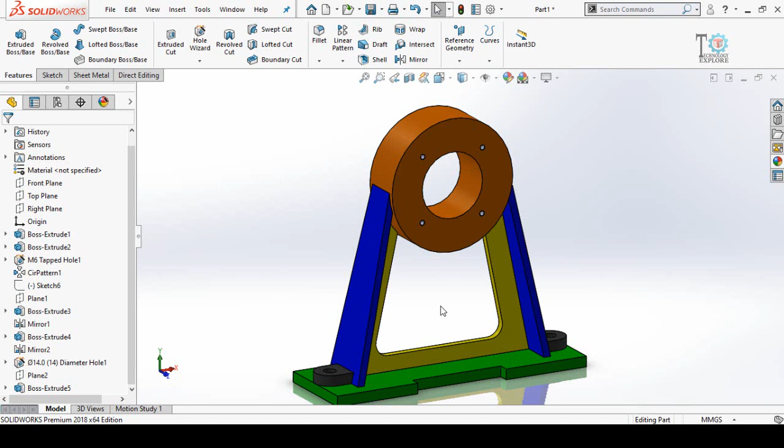My name is Usman Chaudhary and in this video I'm going to make this part by using this drawing. The most complicated portion of this drawing is making this part of the project.

Okay, let's start. First of all, make a print of this drawing and start from the top plane. I will start making a sketch of this part. As you can see, this seems to be a rectangle, so draw a rectangle like this.

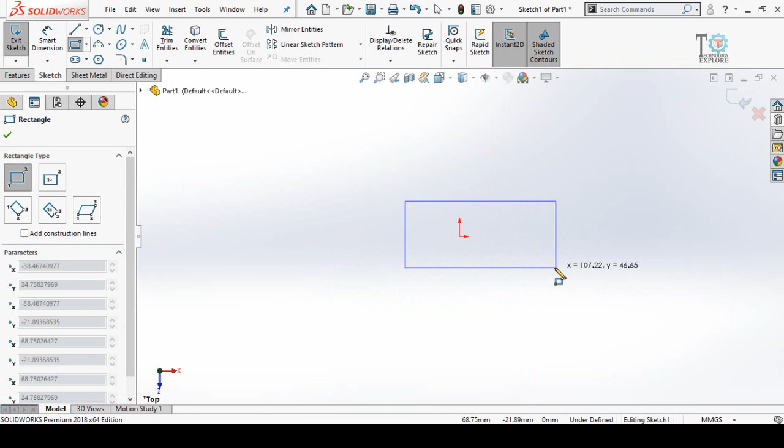Press escape key and then press and hold control key, select the origin and this point, make their relation horizontal. Similarly, make the horizontal and vertical relation for these 2 points. Now define by using smart dimensions.

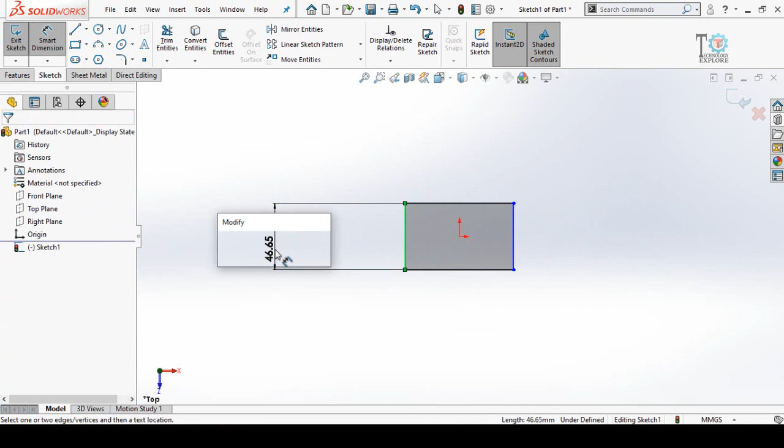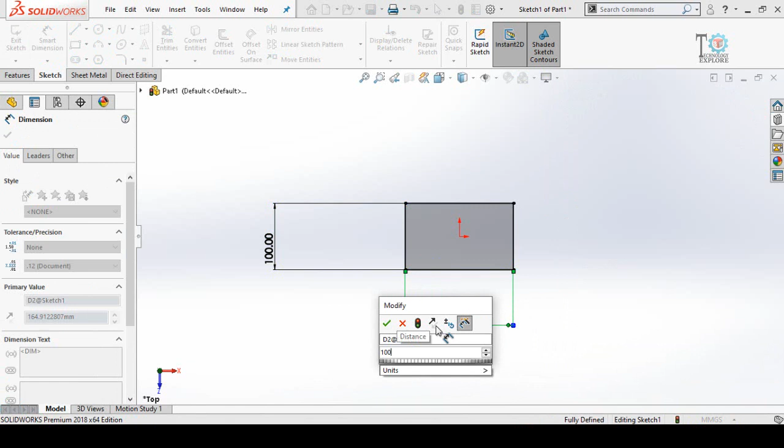This distance is 100 millimeter, and this distance, as you can see, we do not have the complete distance, so we have to sum all these distances. So make the sum: 100 plus 110 plus 100. Draw a line like this.

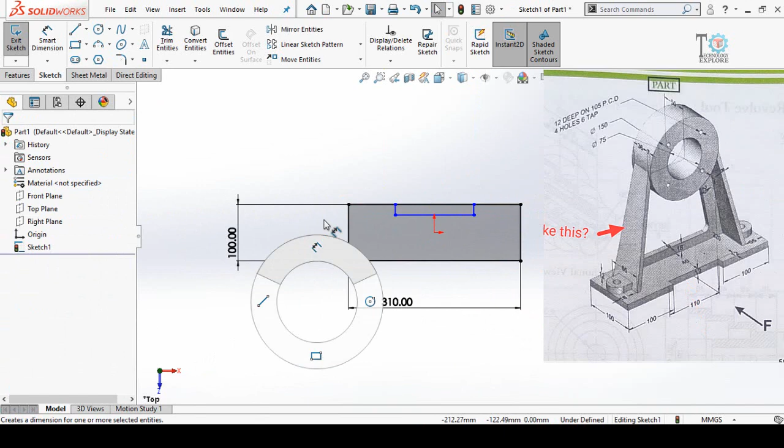Now I'm going to make this cut. Press and hold control key and select origin and this point, make their relation vertical. Define the distance, this distance 12 millimeter, this distance is 110 millimeter. Now press escape key.

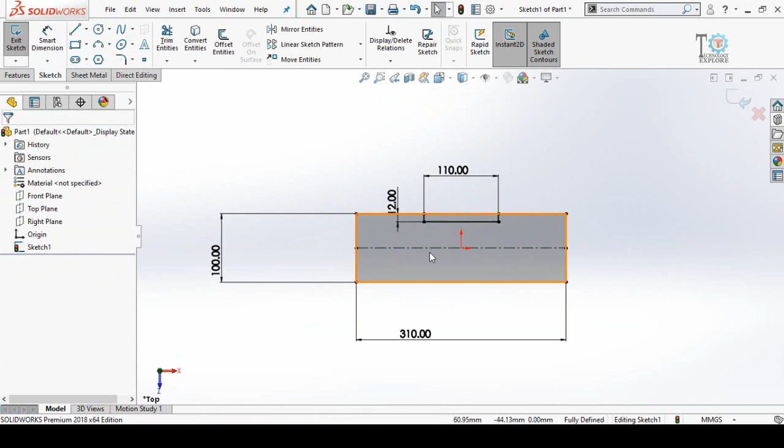Draw a center line like this. Press escape key and use mirror entities to mirror. Click on this box and select this and this. Mirror about, select this box and select this center line, and press OK button.

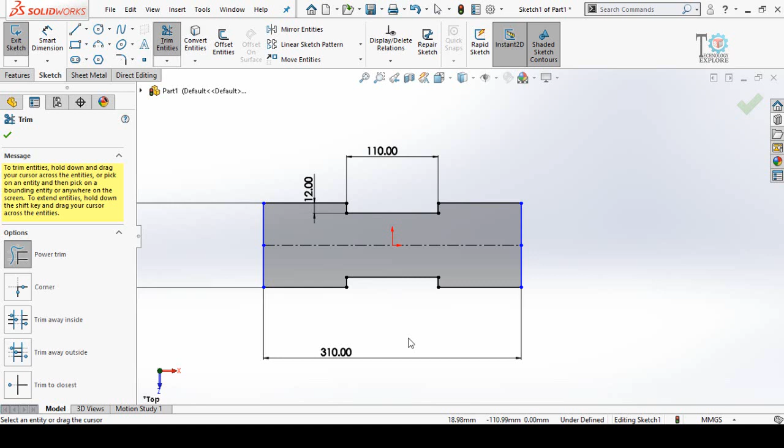Now select trim entities and trim this side, also this side. Press escape key and again define the distance, this distance 100 millimeter. So our sketch is now, you can see, fully defined.

Now we have to extrude this sketch. This is also 12 millimeter.

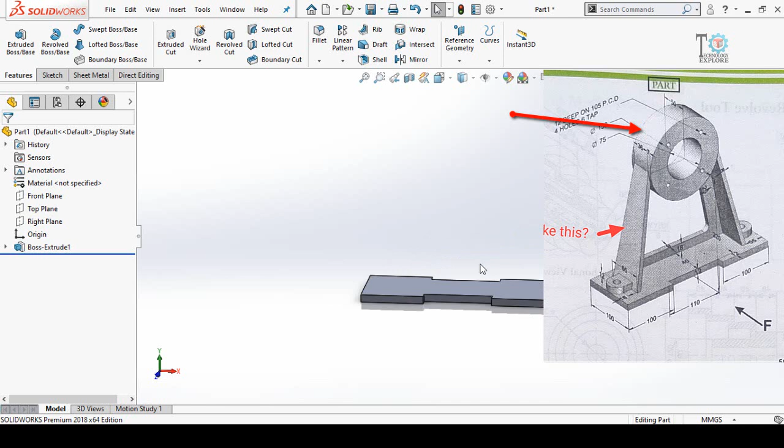Now I'm going to make this ring. We have to click on front plane, so sketch on it, make normal to by pressing Ctrl plus 8 from your keyboard, and draw 2 circles, one circle and another circle.

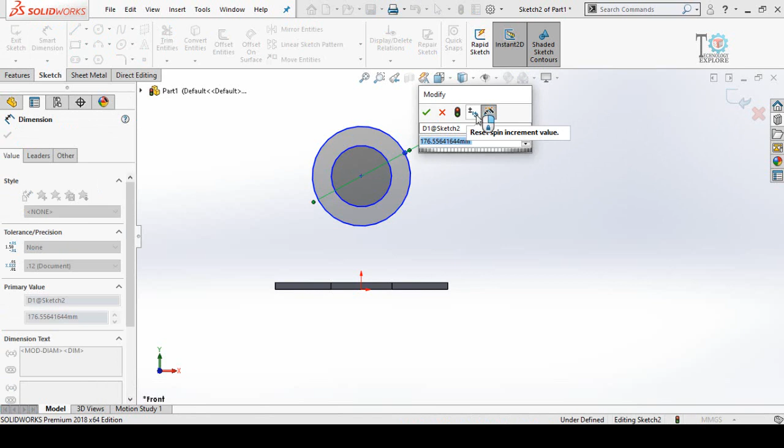Now define the diameter of the outer circle, 150 millimeter, and the diameter of the inner circle, 75 millimeter.

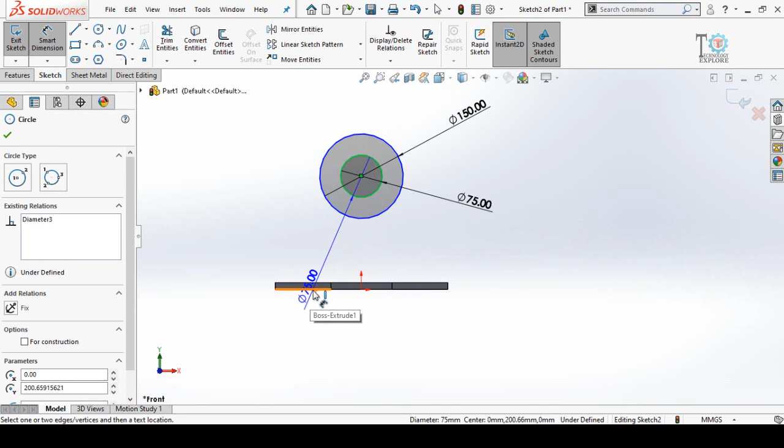Press escape key and select origin and this center point, make their relation vertical. Again define the distance from the center of the circle up to the bottom of this part: it is 220 millimeter. As you can see, our sketch is once again fully defined.

Now we have to extrude it. Go to features and select extruded boss base command, make sure that from here drop down this option and select mid plane. Now define the width of this ring, 50 millimeter.

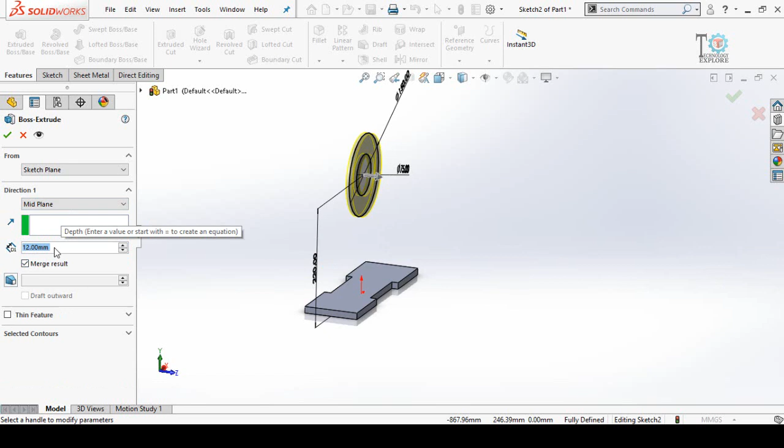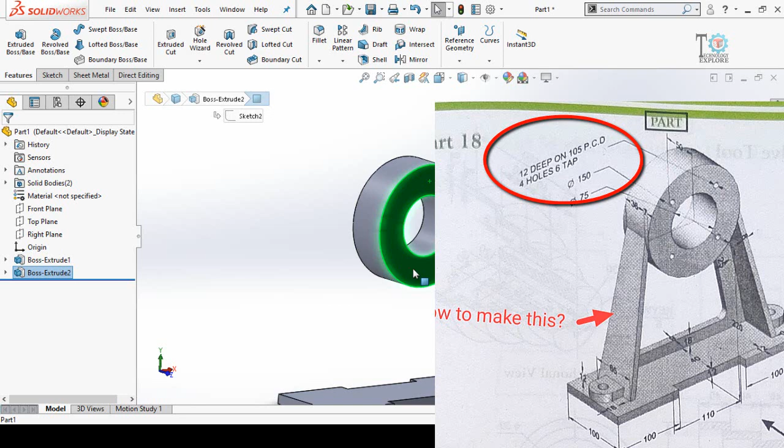Now we have to make 4 holes on this ring. First read the drawing carefully. It's written 12 deep, meaning 12 mm in depth, on 105 PCD, meaning the circular diameter of the holes is 105 millimeter. 4 holes, definitely the number of holes is 4, and 6 tap, meaning M6 threads.

So what I'm going to do is use this hole wizard command. Scroll down and from here select this straight tap option, then again scroll down. From the size option, drop down and select M6. Here is the depth, type here 12 as they were 12 deep.

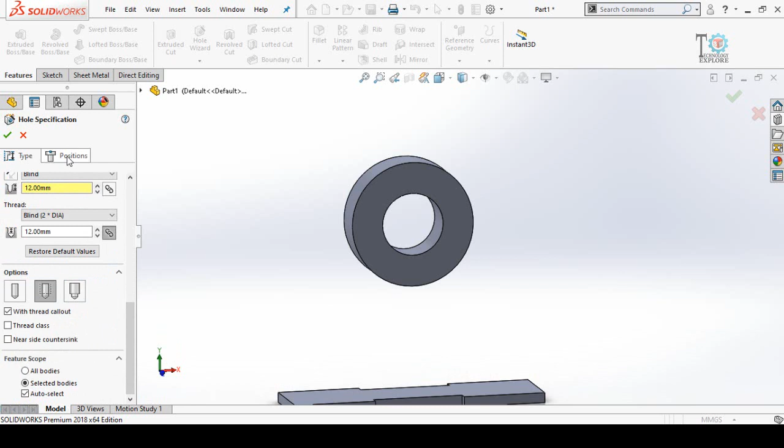Then click on this tab positions, then select this face. Press Ctrl plus 8 from your keyboard and then select circle. Draw it like this. From here select construction geometry for construction.

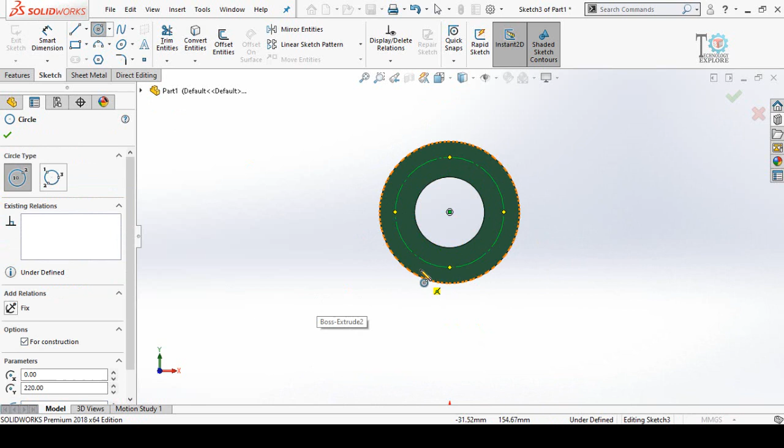Now define the diameter of this circle, 105. Then draw another center line like this. One more center line started from the center point up to this quadrant point. Press escape key.

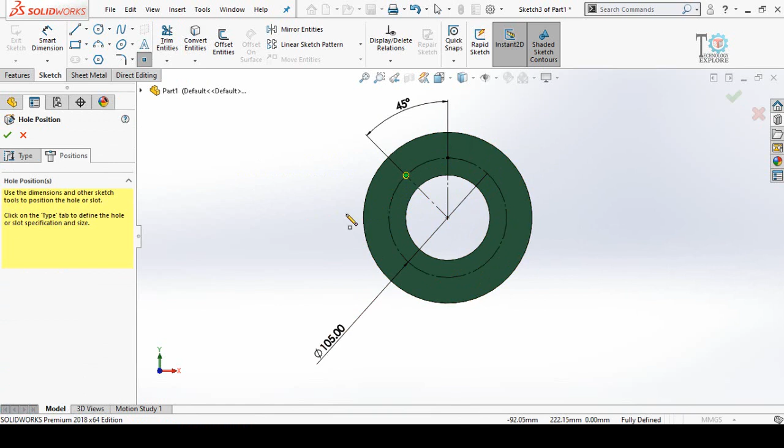Now define the angle, 45. As on the drawing this angle is not mentioned, but it seems to be 45 degrees. So make this line also construction geometry, then drop a point on this point. Now press escape key and then press this button.

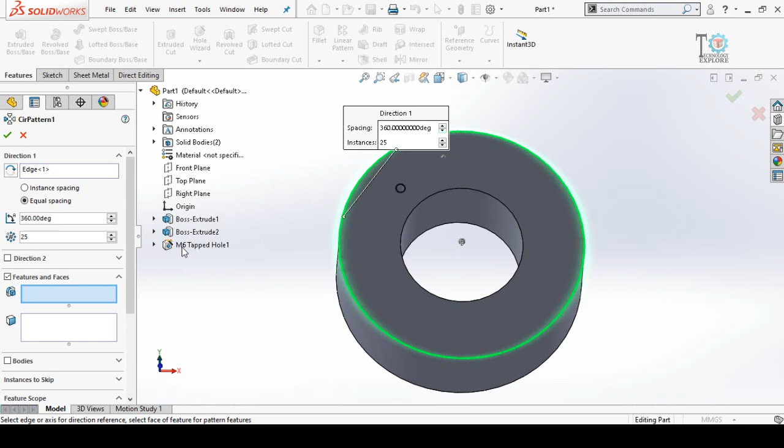Now we have to make a circular pattern for this hole. Click on the arrow below the linear pattern command and select circular pattern. Click on this axis box and select this circle. Also select this features to pattern box, expand the parts tree, and select M6 Tapped Hole. Type quantity 4, make sure equal spacing is checked, and press OK button.

Now I am going to make this part. This seems to be a difficult part of this drawing, so there are a number of ways to make it. For me, what I'm going to do is make another plane like this.

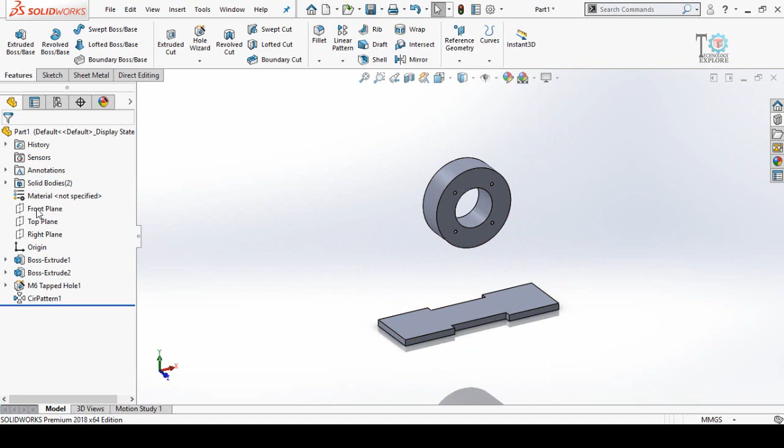For that, first I have to sketch on front plane, make normal to, and then select center line, and start it from here up to this quadrant point as you can see on the drawing. Now press escape key.

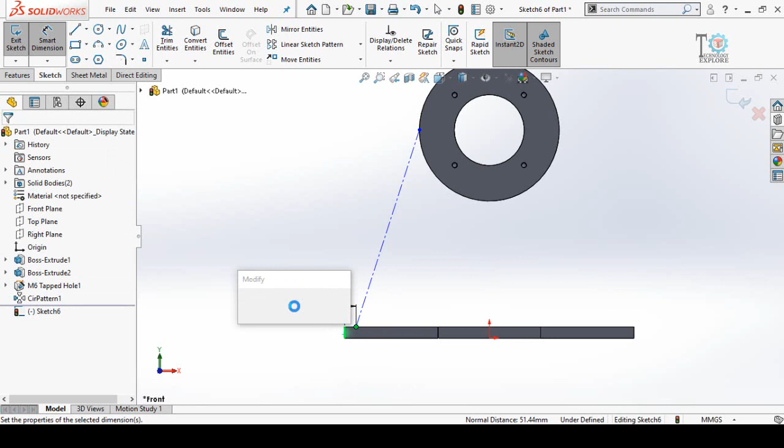Now define the distance from this line up to this point, 35 millimeter. Now draw another center line started from this midpoint like this. Define the distance of this line: this distance should be the thickness of this part, which is 8 mm.

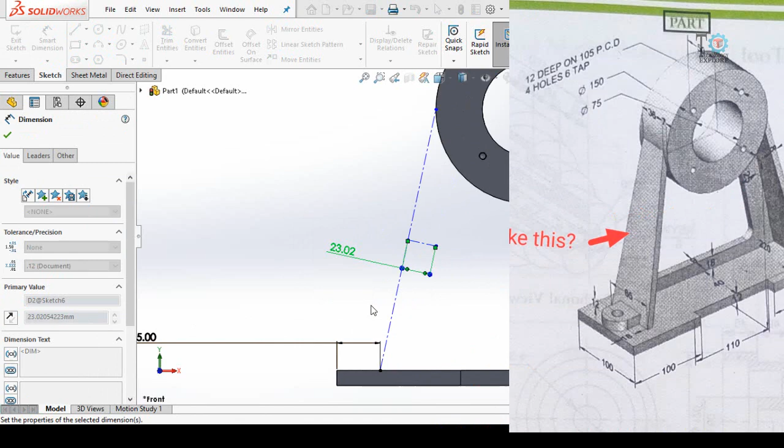Now press this button to save and exit from sketch mode. Now I'm going to make a new plane. For that, click on reference geometry and select plane. First reference, select this line, and for the second reference select this point. So here is the plane. Press OK button to create this plane.

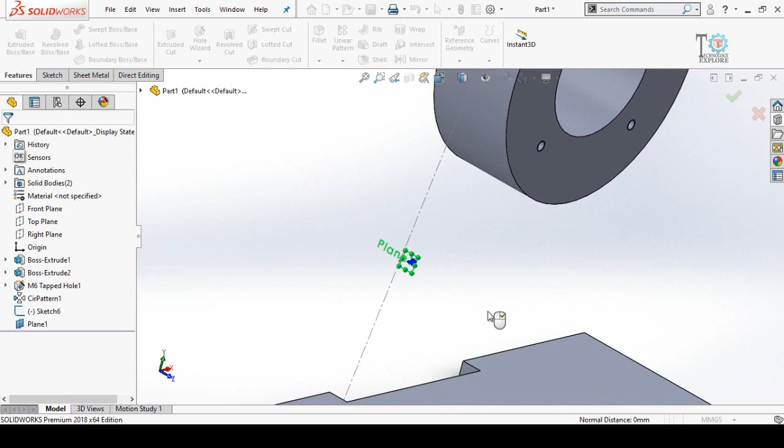Now click on this plane and sketch on it. Make normal to by pressing Ctrl plus 8 from your keyboard, and then draw a sketch using the line command.

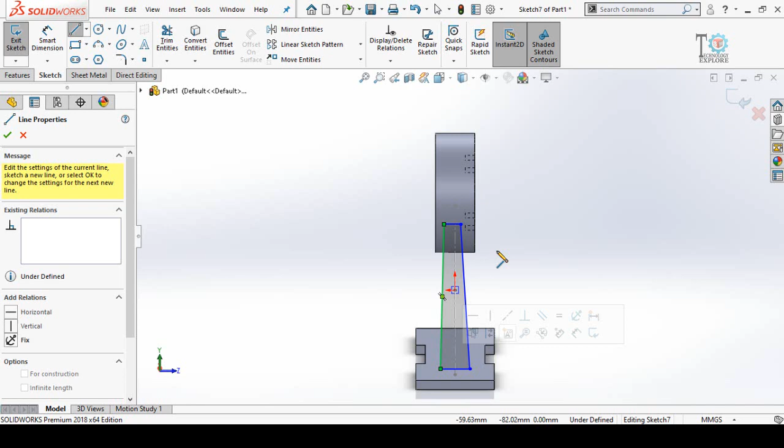Press escape key. Now select this midpoint, origin, and this midpoint. Make their relation vertical.

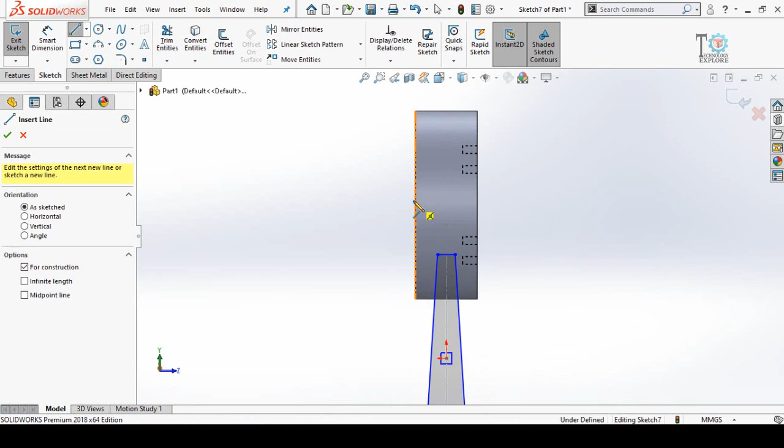Draw a center line from this midpoint up to this point. Press escape key and make their relation horizontal.

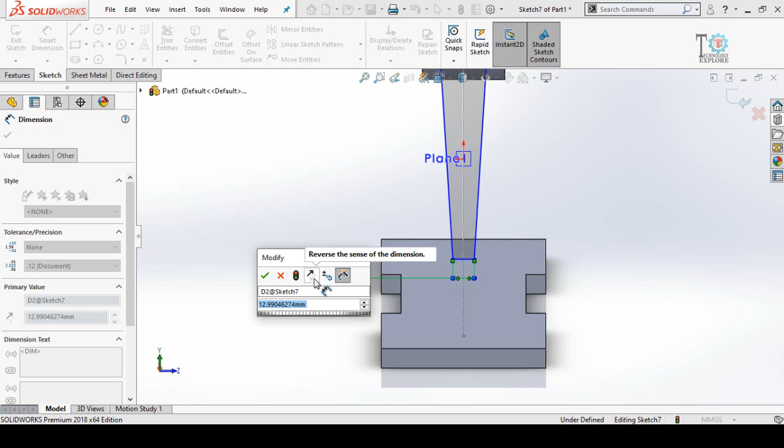Now define this width 36 mm. Also define this width 65 mm. Now draw another center line and start it from this point up to this point.

Press escape key. Select this point and make it fixed. Now select this line and make it horizontal. So our sketch is now fully defined.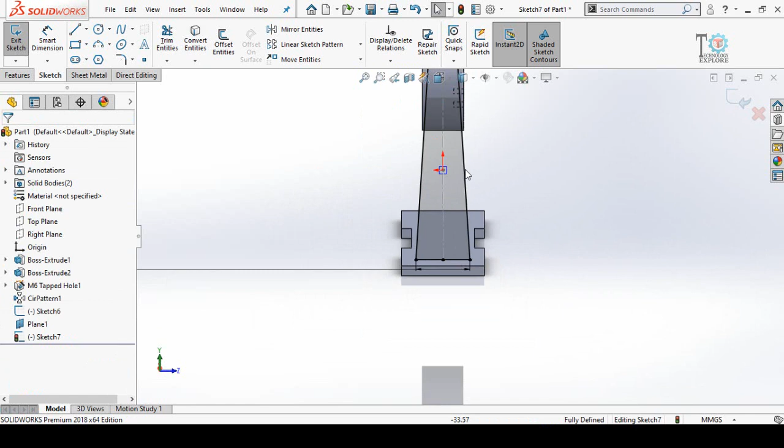Here you can see. Now I am going to extrude it. Go to Features tab and select Extruded Boss Base command. Extrusion thickness is 8 mm, but in the opposite direction. So reverse the direction by clicking on this box. Press OK button.

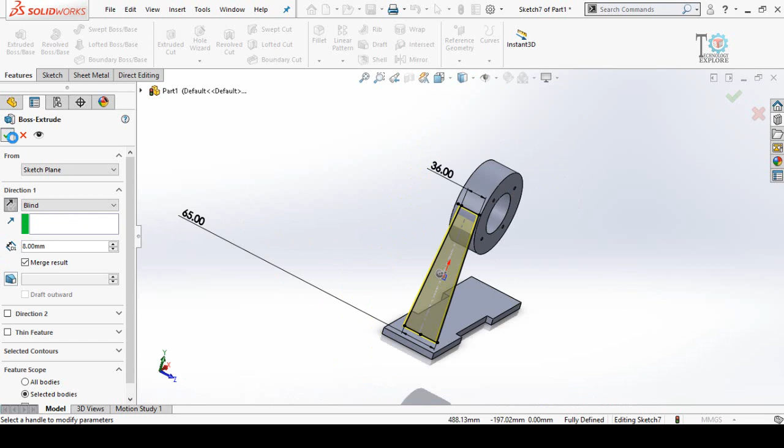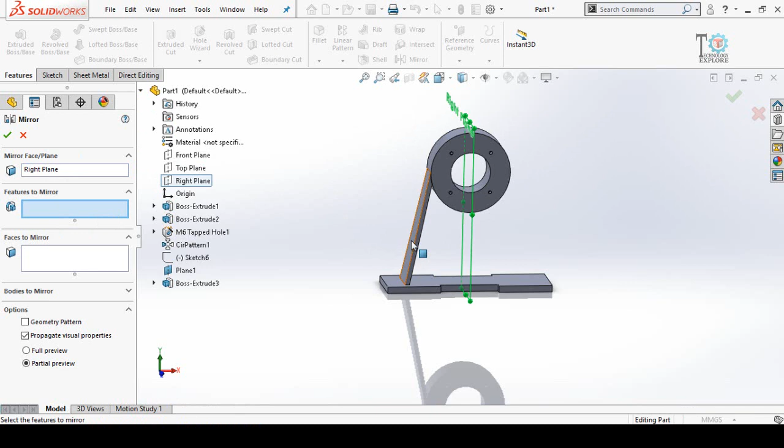Select this sketch and hide it. Now I'm going to mirror this part on this side. So for that, click on mirror command here and click on this box, mirror face or plane. Drop down this menu and from here select right plane. For features to mirror, select this part and press OK button.

Now I'm going to make this portion of the drawing. So for that, click on this face and sketch on it. Make normal to and then draw a sketch by using line command.

Like this. Now draw a 3-point arc. Press escape key. Select this line and this arc. Make their relation tangent. Also tangent relation for this line.

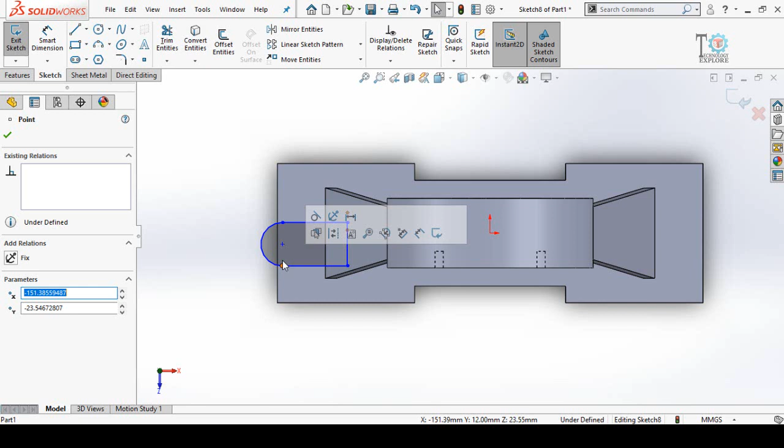Select this point, this center point and this point. Make their relation vertical. Now select this center point and the origin. Make their relation horizontal. Now define the width of this line.

As in the drawing there is not mentioned the width of this line, but we can assume this width. As you can see, this distance is 18 mm. So this is the radius. So the diameter should be 36 mm.

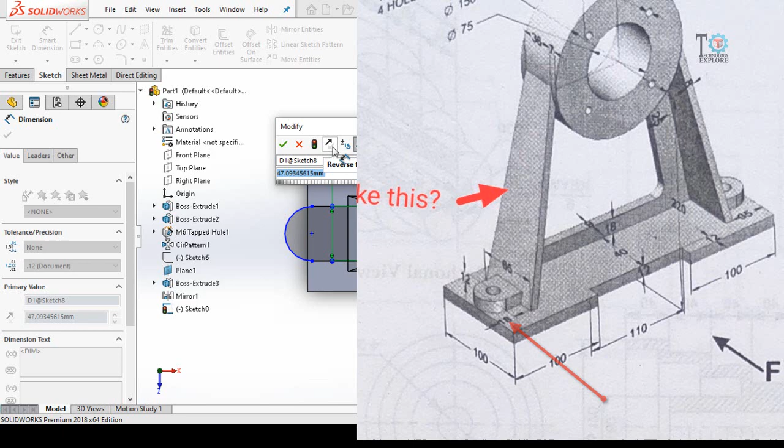And this arc is also a tangent to these lines. So we can assume that this width should be 36 mm. Now distance from this line up to this center point is 18 mm.

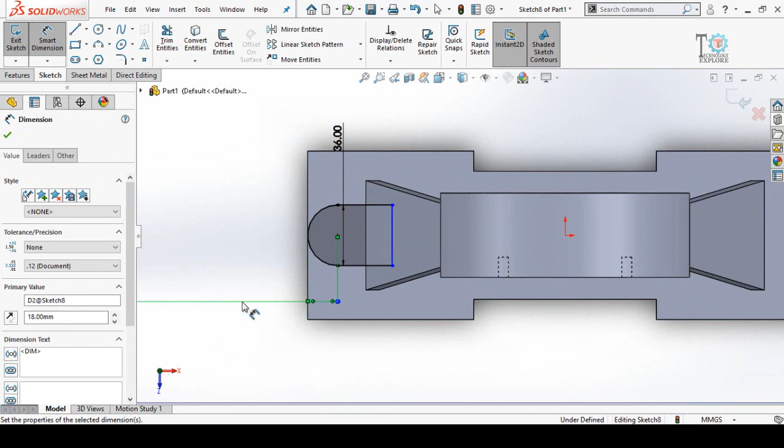Change the shade and press escape key. Select this point and this line. Make their relation coincident. Now we can again change the shade.

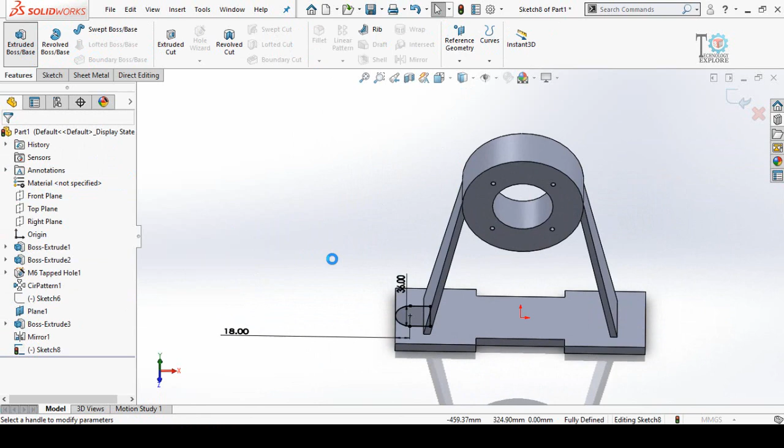Now go to features and extrude it up to 12 mm. Again we have to use mirror command, and in the mirror about we have to select right plane, and for features we have to select this boss extrude and press OK button.

Now we have to make the hole. For that we once again have to use the hole wizard command, and this time we have to make simple hole. Scroll down.

So we have to change the type from dowel holes to drill sizes. So now scroll down and here you can see 14 mm. So the end condition we have to select throughout or through all.

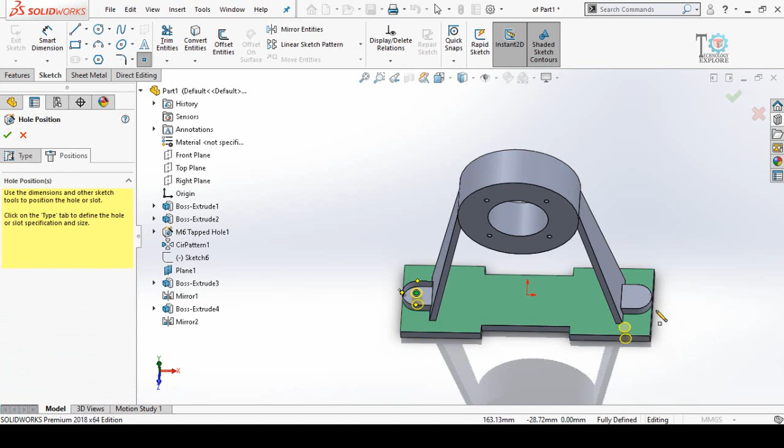Then go to positions tab and select this face. Drop one hole on this center point and then drop one hole on this center point and press OK button.

So next step is that we have to make this portion of the drawing in this part. So first let's see drawing. As you can see, the distance from this face up to the face of this portion is 40 mm.

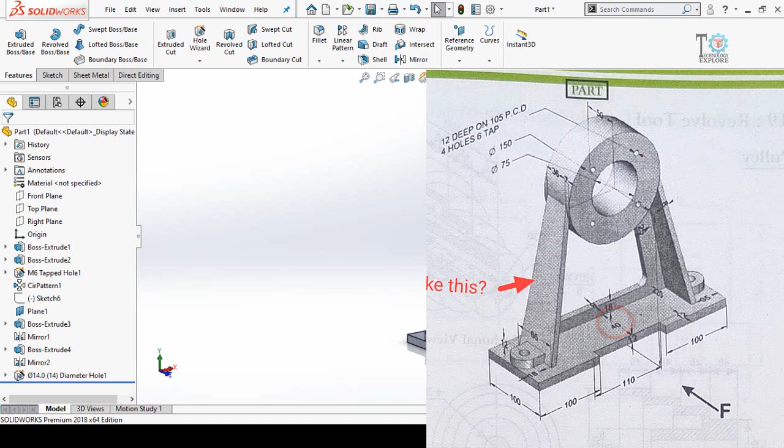So first we have to measure the distance from this face up to the front plane, and this distance is 30 millimeter. So we need the distance 40 mm.

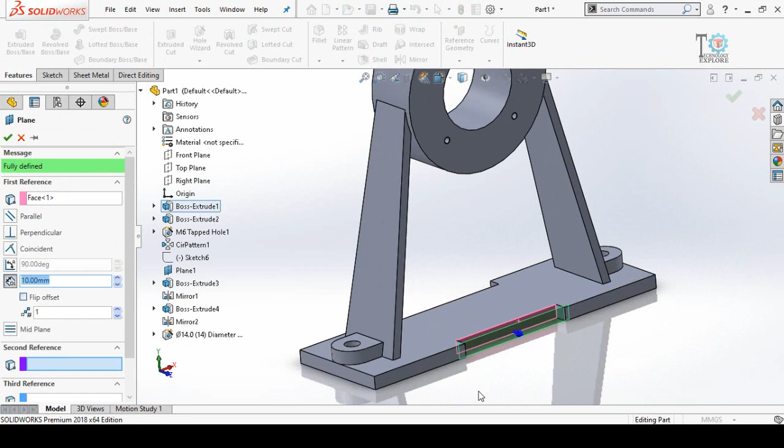So once again we have to make another plane which is 10 mm apart from this face. So type 10 mm and in the reverse direction. So check this box, flip offset and press OK button.

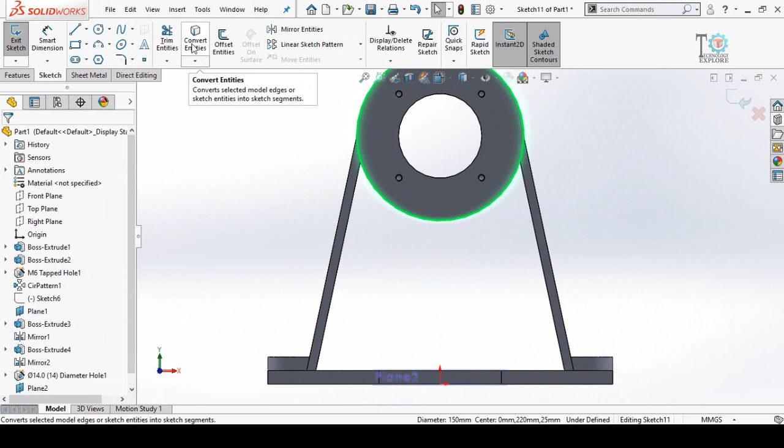Now sketch on this new plane. Make normal to by pressing Ctrl+8 key from your keyboard and then select this circle, then select convert entities. Also select a line and draw a sketch.

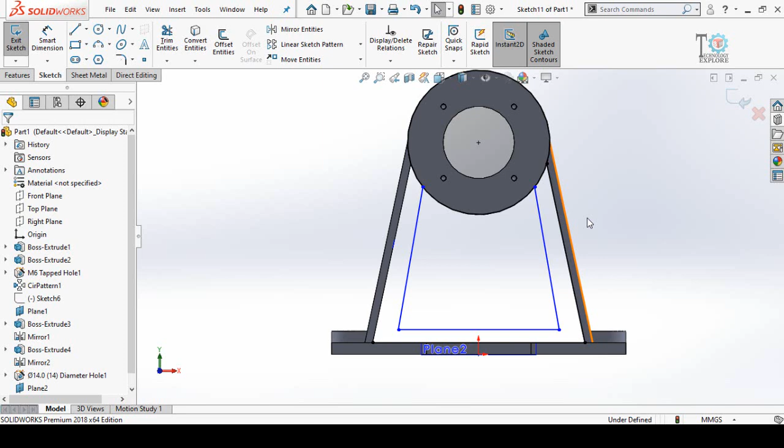Like this. Press escape key. Now draw a sketch like this. Press escape key and now use trim entities and trim this side of the circle and also this side of the circle. Press escape key.

Now select this sketch fillet. Fillet radius is 15 mm. Select this and this corner. Press OK button. Again press OK button.

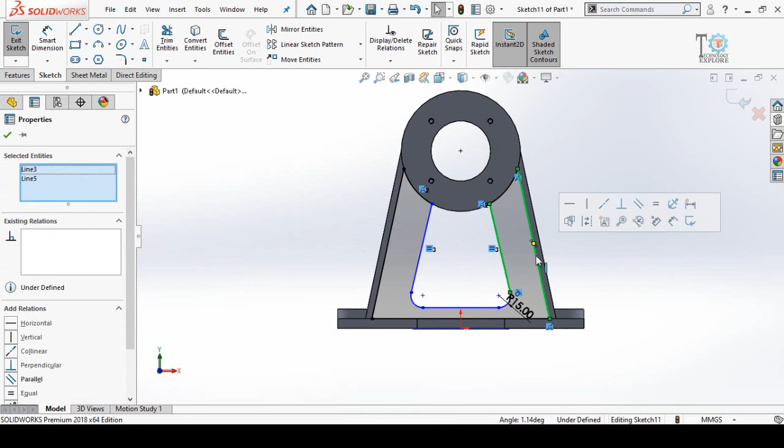Now select this line and this line. Make their relation parallel and then define the distance from this line up to this line, 25 mm. Distance from this line up to this line, 18 mm.

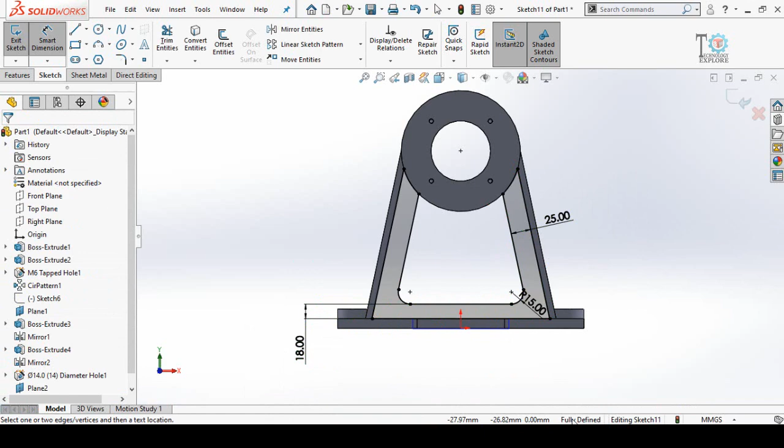So our sketch is now fully defined. Now go to Features tab and extrude this sketch. On the opposite direction, the extrusion thickness is 8 mm. Press OK button.

So this is how we can draw these type of parts in SolidWorks.